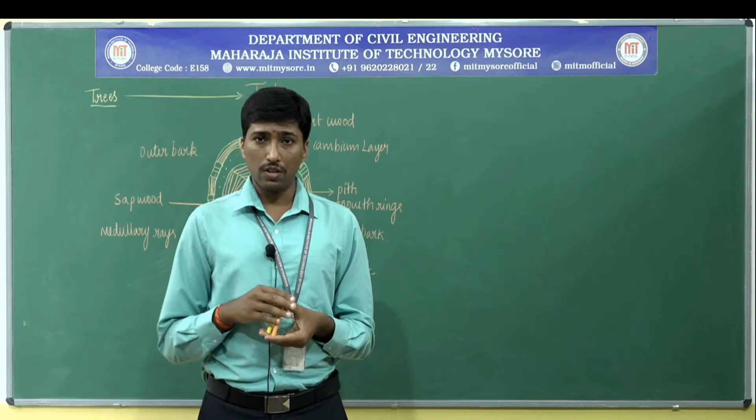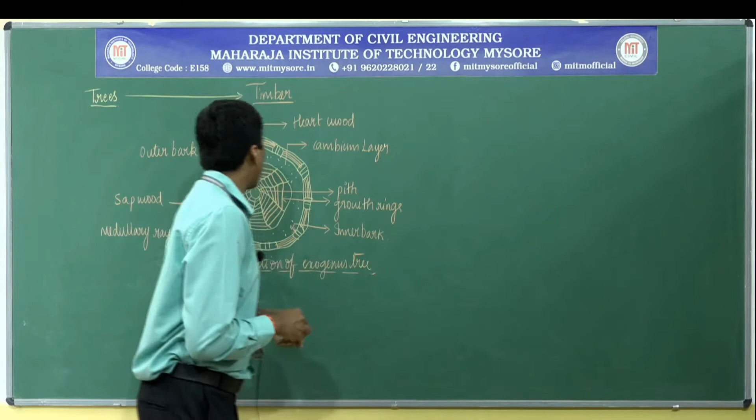Whether on the basis of growth of the wood on the outer surface or inner surface - that is a major classification. Hence we go for naming the classification as endogenous as well as exogenous type of trees. What are exogenous or endogenous? Let us get to know.

Endogenous and exogenous. Endo, the term here, represents the inner. Genus means it is the type of species or plant, the kingdom classification done in the taxonomical part of classification, where the generation of trees is taken into the picture. Whereas if you take exo, it means the outer.

These exogenous trees are mainly utilized. They have been broadly classified again into two types: one we call coniferous and the other deciduous type of trees. Let me take the classification to the next part here.

The exogenous type is classified into conifers and deciduous trees - coniferous or conifers, and deciduous type of trees.

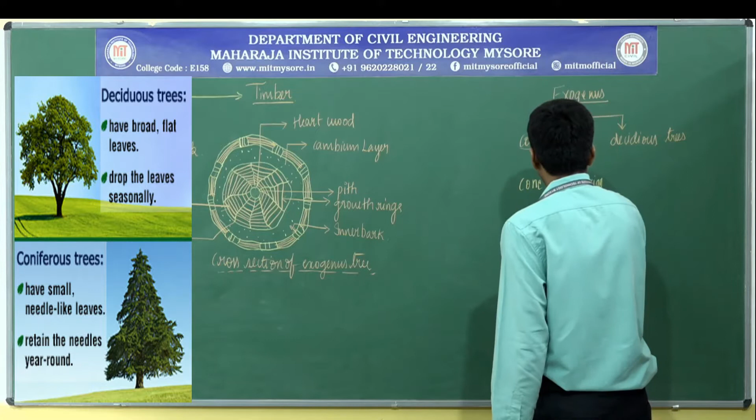The conifer type of trees means the leaves are flattened and scaly in appearance, having a needle-shaped type of edges. They have tapered edges. That kind of tree is what we call coniferous type of trees. They are cone-shaped bearing type of fruits, which is how we physically classify them - cone shaped bearing fruits.

These are called coniferous, and this cone-shaped type of fruit is where the trees are built, grown across, or subjected to plantation and set for attaining maturity. In this part, it is going to yield the type of wood we call sapwood. What is meant by sapwood? Whenever a tree has to grow, starting from the seed, then the plant arises - whatever vascular bundles are present, they tend to decay in the earlier stages, or what we come across is they tend to die. What happens is the death portion or the fibrous membranes are compactly arranged without any intercellular spaces, leading to the formation of a region we call the pith.

A pith is a region - here you can see in the case of an exogenous type of tree. I'll explain this in the later part. Now deciduous trees, obviously, are broad leaf type of trees. Examples here are teak and oak.

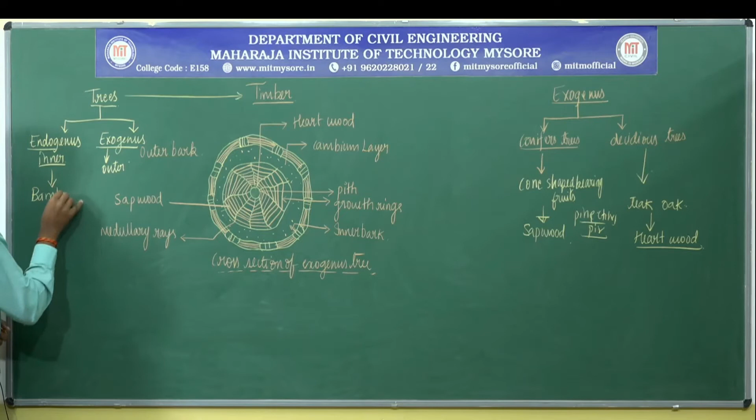Now moving on to the next part, endogenous, as I have told, means inner medium. Example: the bamboo tree. Bamboo is a fine example, or classic example, which I am going to suggest. Why? Because if you take the Malnad regions or any region all over Karnataka, this bamboo tree is growing to a greater extent.

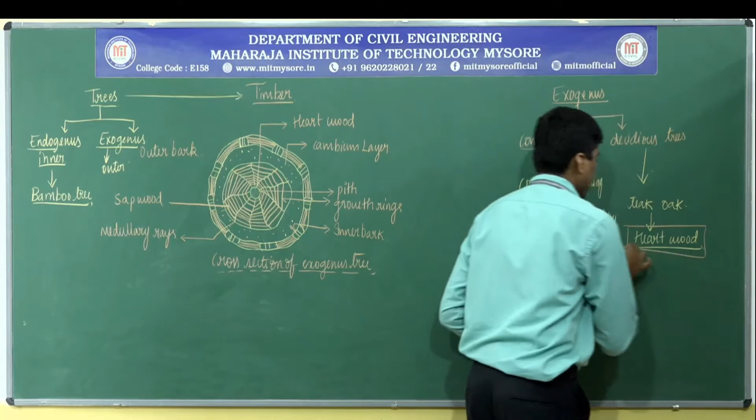They are being carved out easily. They are hollow in nature. Therefore this wood is utilized for various different purposes and is cheaply available. Most of the wood available in a cheap manner is sapwood, which is lighter in nature. Heartwood means slightly heavier in nature, and this proves to be slightly costlier compared to sapwood.

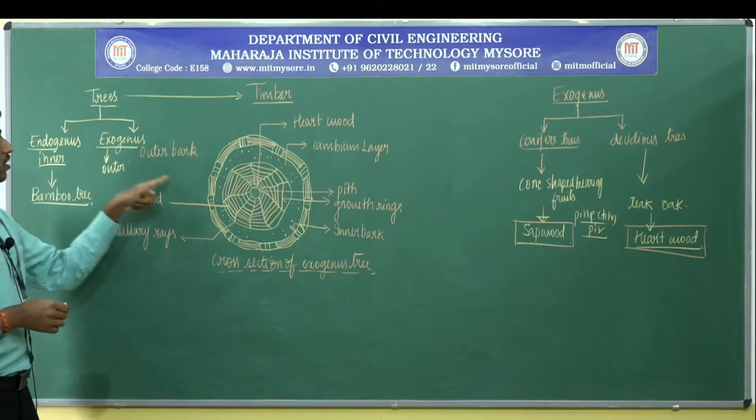Now let us take up the classification part which we have completed, but the pending part is how to know whether a tree is endogenous or exogenous in nature. If you take this example, the cross section of an exogenous tree...

Starting from the inner region, the vascular bundles are completely arranged, compactly arranged without any intercellular spaces. Upon their death, they become a dry mass completely over a period of time. The central region, we call it the pith.

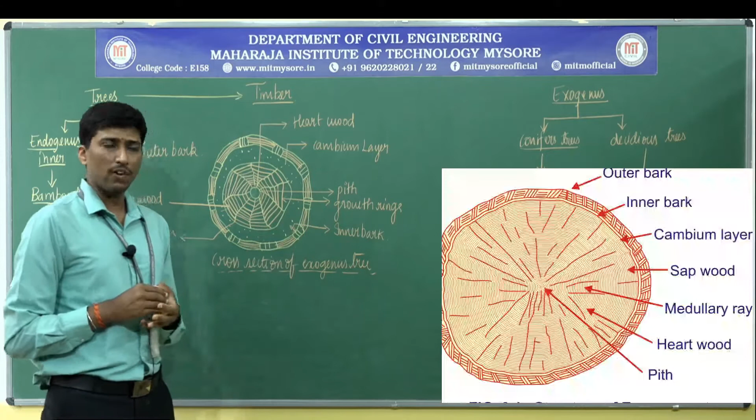After this, there are ring formations of structures drawn here. The occurrence of these rings, we call annual rings, or growth rings. Each ring gets added up year by year. So how many rings are there? They have been counted, and on that basis, the age of the tree is determined. This is the basis for the formation of the growth ring, especially what we also call annual rings.

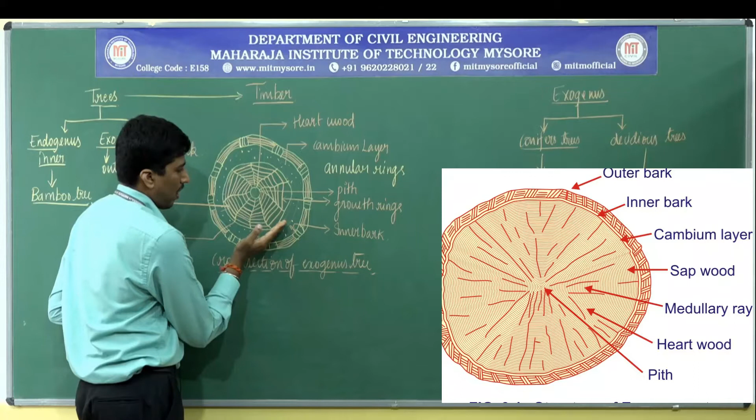Next, the region completely surrounded here, where the rays are visible, we call the medullary rays, which originate from the inner portion - this portion we call the cambium layer. That means the region between the pith and the sapwood, consisting of the medullary rays which have originated, and the inner bark - that particular region or layer is what we call the cambium layer.

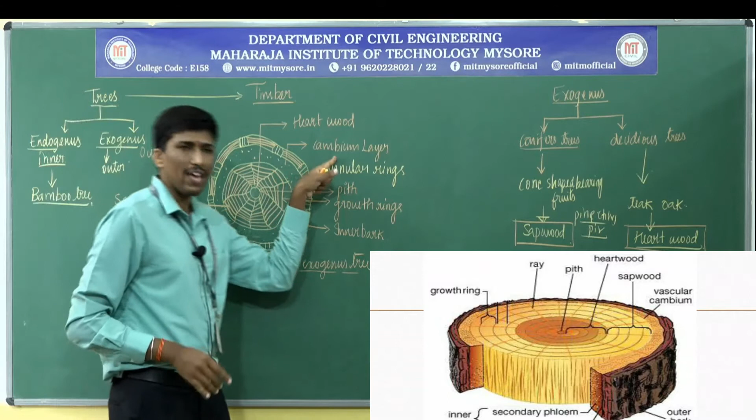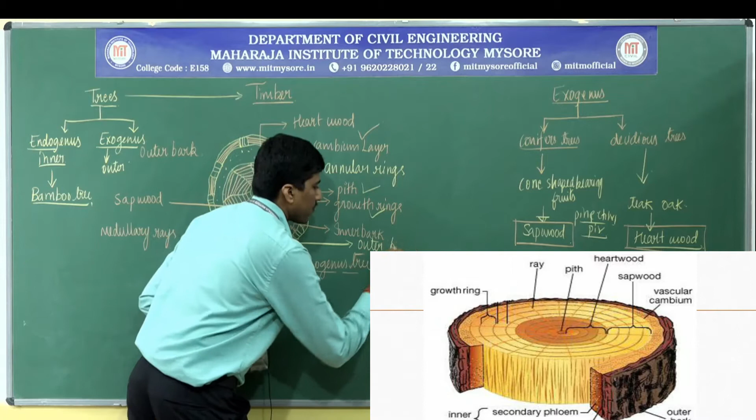Pith we have completed, cambium layer we have completed, growth rings we have completed, and the inner bark. The inner bark, as it develops gradually, numerous parts of growth take place, and that we call the outer bark. This is one of the key characteristics of exogenous trees, where bark growth takes place.

Now, the wood which originates apart from the center region, we call sapwood. They are lighter in nature due to the ascent of the sap. They still have the activity we call the ascent of sap, where water is transported through the vascular tissues over a much greater height. Due to osmotic pressure, it travels up - that's why this part of the wood is slightly wet in nature, which we call sapwood.

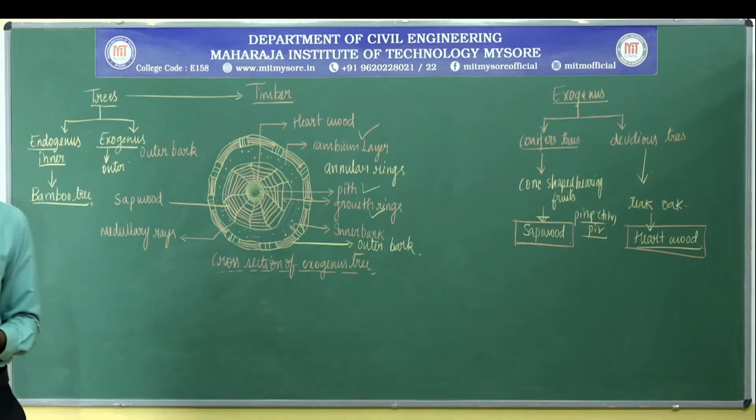The part which is completely heavier in nature, compactly arranged, we call heartwood - the central region portion we come across for this covering. The remaining portion beyond the heartwood, we call sapwood. This is the classification especially regarding the exogenous type of trees.

If you take any of the trees, whether mangrove, mahogany, or even teak or oak, whatever you take, the classification or the layer which has been formed, or the rings, remains the same. Only thing is each of them has a different genus, and the rate of growth also tends to differ.

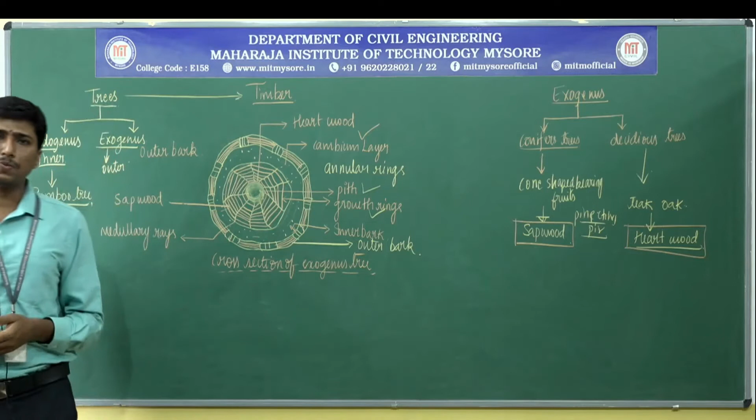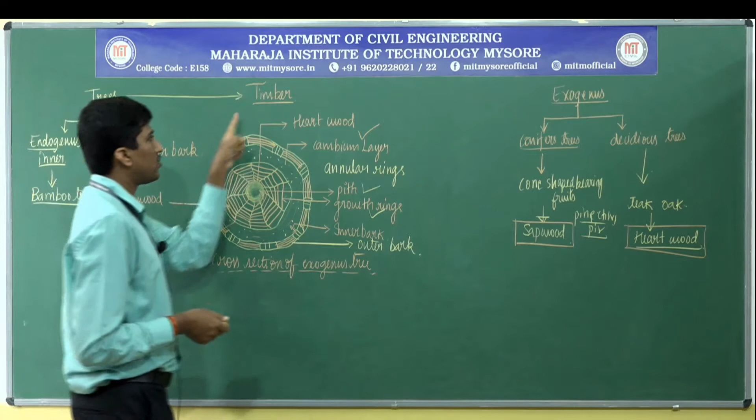Now, in the next part of timber, we need to see how timber has been utilized in society. Do they directly cut the wood and utilize it for construction purpose? If yes, in what manner? If no, what are the steps or procedures to be followed so that durability tends to increase, or the life cycle or lifespan of the timber tends to be much more feasible in nature. As I have stated, timber is the structural unit of wood, or structural part of wood.

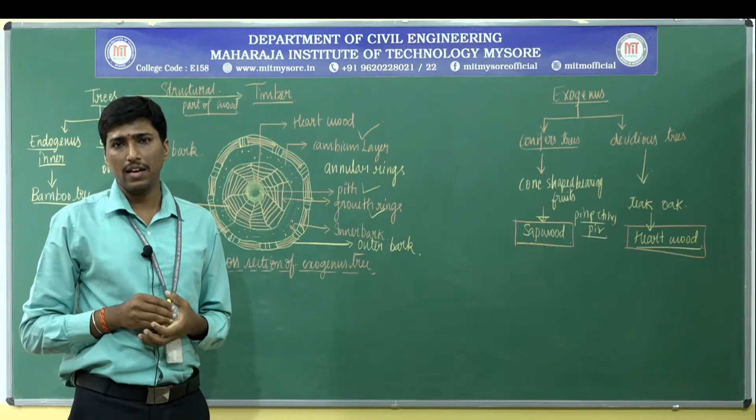All timber can be regarded as wood, but all wood cannot be mentioned or stated as timber. This is one of the important notes that you need to keep in mind.

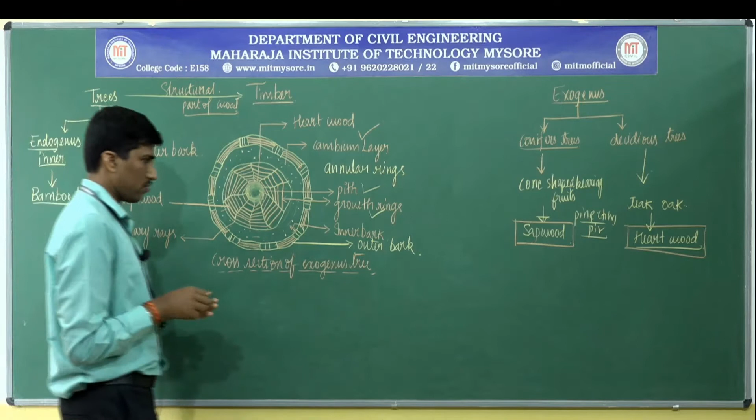Now moving on to the next part, it is how timber is manufactured. In the process of manufacturing timber, there are different things to be allocated. What are those? Let us get to know one by one. We have the process of manufacturing of timber.

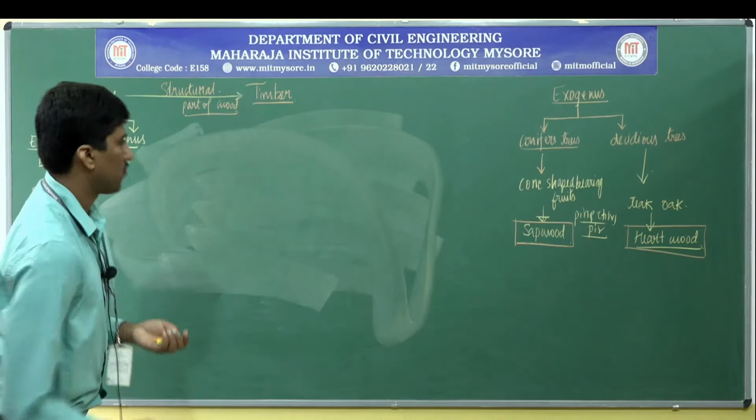First one is related to felling of trees. After the felling, it has to be properly seasoned. That we call as seasoning of trees.

Meanwhile, there is also another sort of classification in the seasoning. What are the different types, how it is being done, how it has to be cut, and how it has to be converted, and how it should be marketed. Before marketing, you need to have the preservation. Therefore, you have the conversion process, conversion, and third one is conversion of trees into the formation of timber. Finally, you need to have the preservation methods. Then you can go for the marketing of the timber.

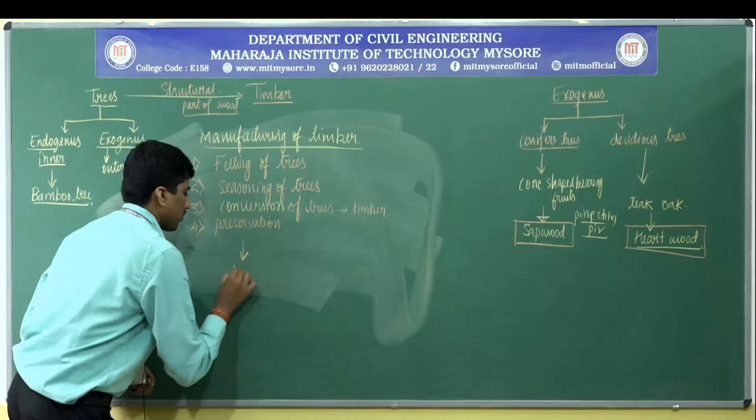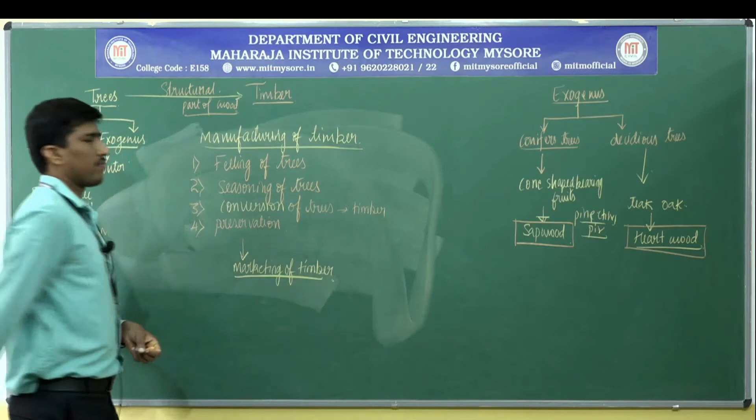So therefore, in those particular cases, water has to be driven away due to osmosis, and the felling of trees should also be taken care of at the right time. If it has been completely or over matured, then another problem takes place—either the heartwood or the sapwood, both of them have some problems. What are those problems?

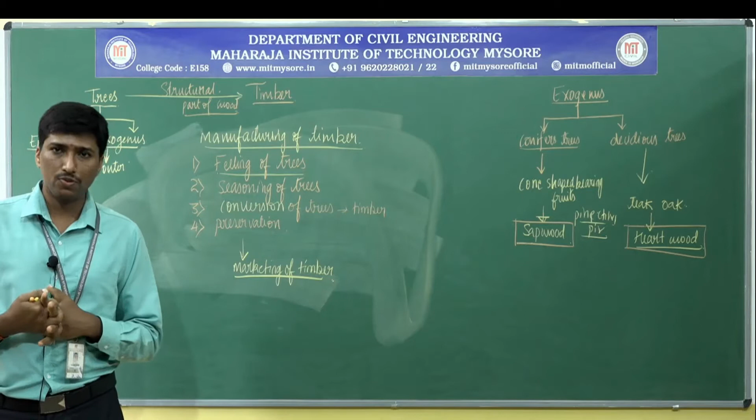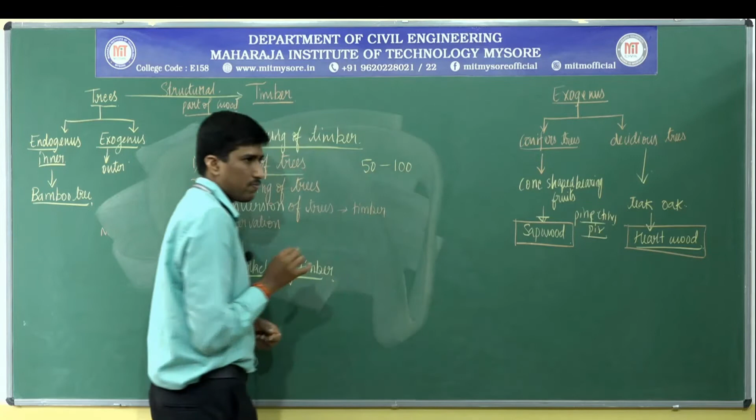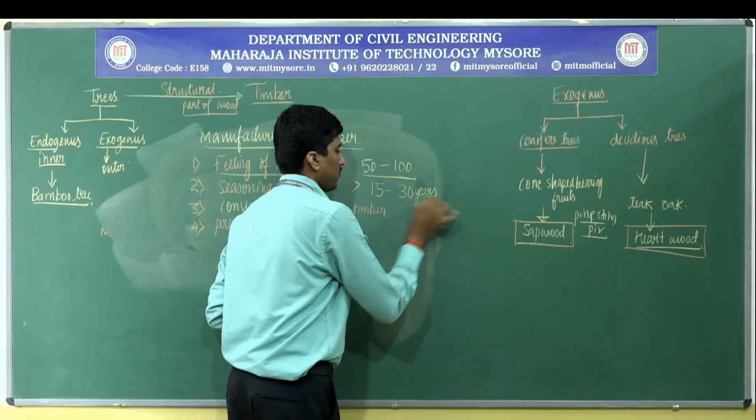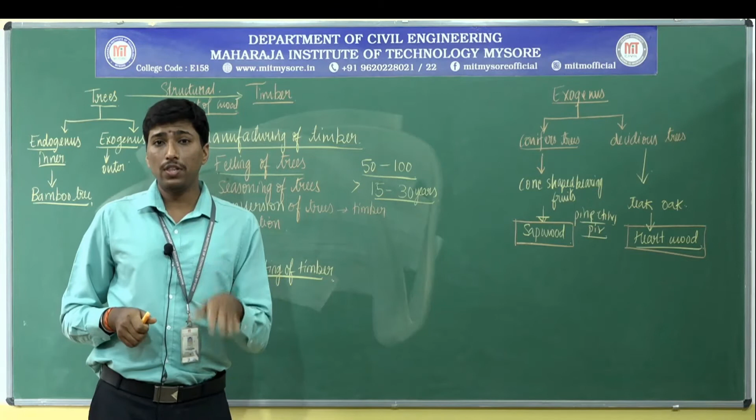Mainly, if you see in the case of age 50 to 100 years, some trees possess 50 to 100 years as the age of maturity. Sometimes for some trees it is greater than 12, or what we call 15 to 30 years. There are different sorts of classification because felling of trees is not common, and it depends upon the type of trees which are being grown in the plantation.

Next thing is seasoning of the trees. Here, one point I forgot to tell you: if the felling of the trees is attained after maturity, then the heartwood begins to decay. Therefore, care has to be taken that the cutting or felling of trees should take place at the right time, or the age of maturity.

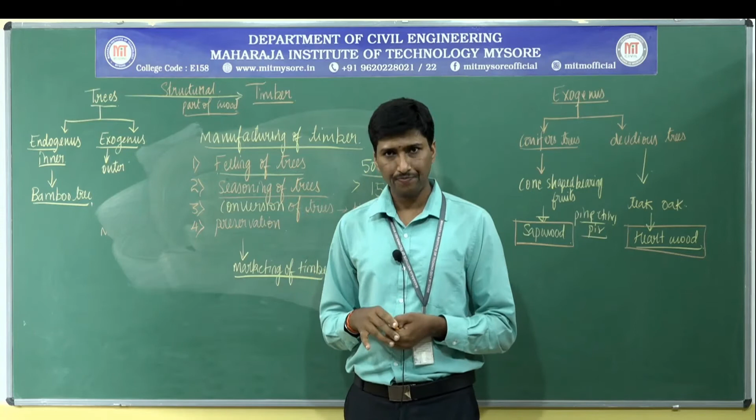That means the process of subjecting the trees either for circulation, or for thermal air circulation, or in the case of water, or in the case of boiling—that kind of phenomena to reduce the weight of the trees, we call seasoning. Seasoning involves two types: one we call natural seasoning, and then artificial.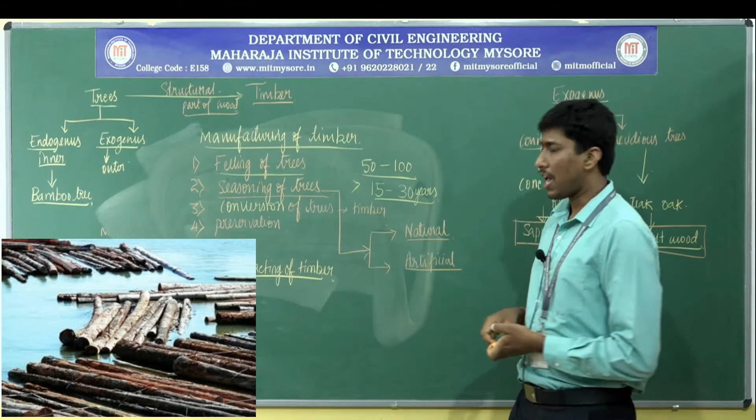What is meant by natural part of the seasoning of the trees? When trees are cut, as told earlier, 50% of the weight contains water, and therefore it has to be removed. Otherwise, the wood is of no use if taken for any construction purpose, especially for any load-bearing part, or maybe battens or a wooden beam. So it has to be seasoned, either through air or by passing through water.

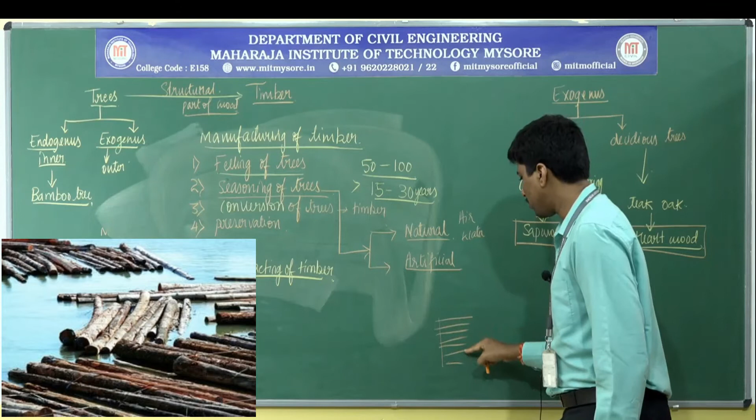These are the two types: air or water. These are the two mediums for circulation, where the wood has been stacked. Either it is in the case of 1-9 like this, 1, 2, 3, 4, 5, 6, 7, 8, 9, stacked this way, or maybe in a crisscross manner.

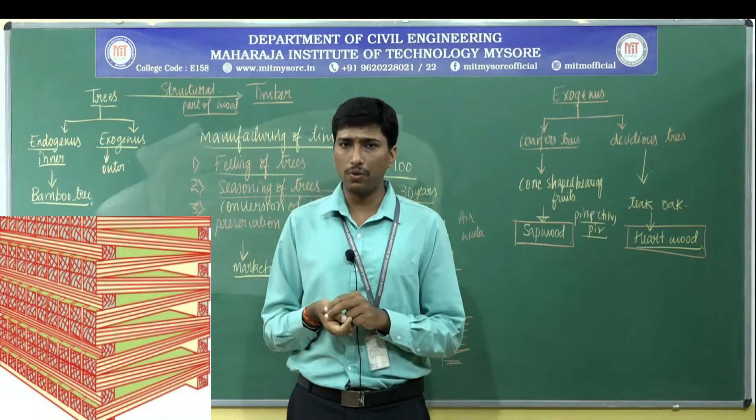In the crisscross manner, the stack of wood is arranged. Normally they have to be kept in a horizontal manner, not vertical. The log of wood which has been taken up has to be kept horizontal, especially to provide free circulation of air.

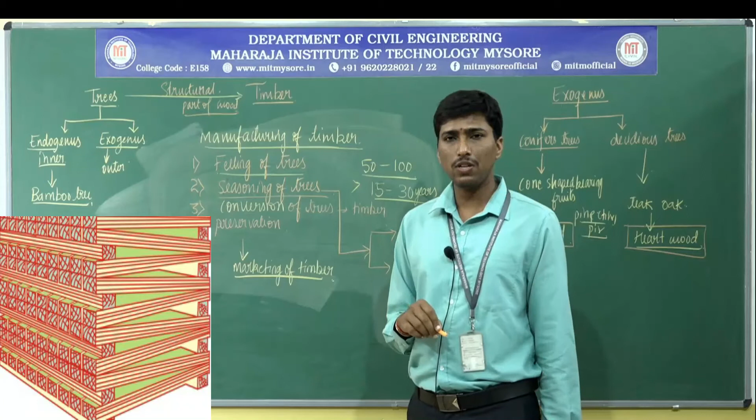Now, in the case of artificial seasoning, it is done through different processes. One is through the boiling method. Second is related to oven drying, subjected to large ovens, and passing of electric current for seasoning. Even the usage of chemical salts is utilized for artificial seasoning.

Now if you take boiling, a large tank is made so that the log of wood is completely immersed into the water, and the water is made to boil. That kind of industry has been established since the past. Here, boiling takes 3 to 4 hours, but more labor is required for it.

Hence it is not an ideal method, but instead of boiling, steam curing can also be done, where only a small quantity of water is required but the temperature rises more. Therefore it almost reduces the seasoning period or span, ensuring that shrinkage is maintained in proper conditions, and that warping or decay of the wood should not take place.

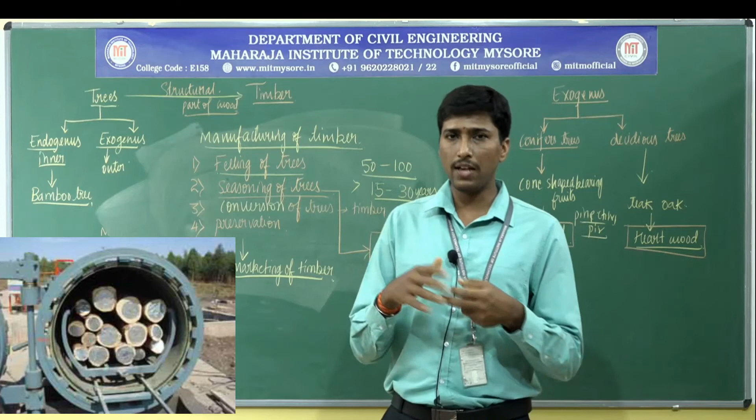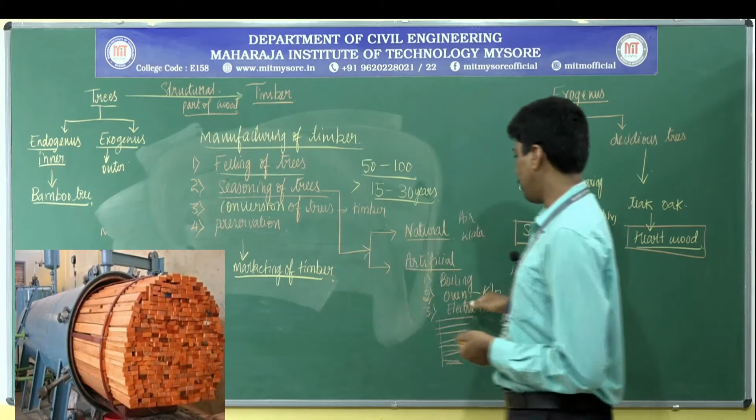That is one thing. Oven drying, where the log of wood is placed in a large scale type of oven, what we call a kiln. This is kiln seasoning, like a type of oven. The flue gases are passed over it, and the heated air is passed through it for a continuous period of time, minimum at least 6 months or so, before it can be utilized. Or in other cases, maybe in a period of 2 to 3 months also.

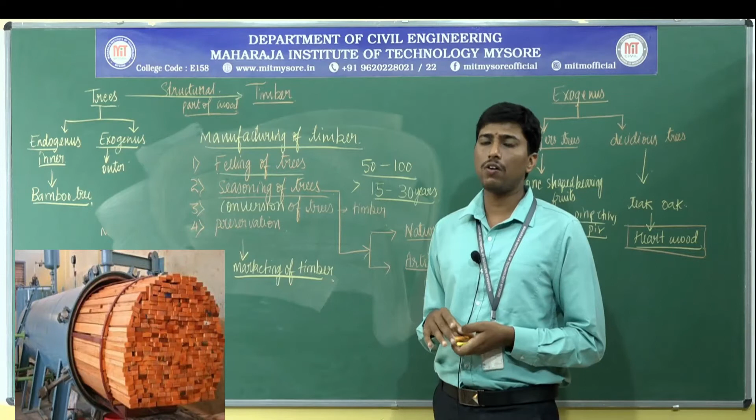Next, electric current means - obviously you know the phenomena of Ohm's law, isn't it? V is equal to IR. Same thing here: the electric current is passed through the wood, where wood acts as a conductor of electricity. Therefore, resistance will be slightly lesser in the case of wet condition.

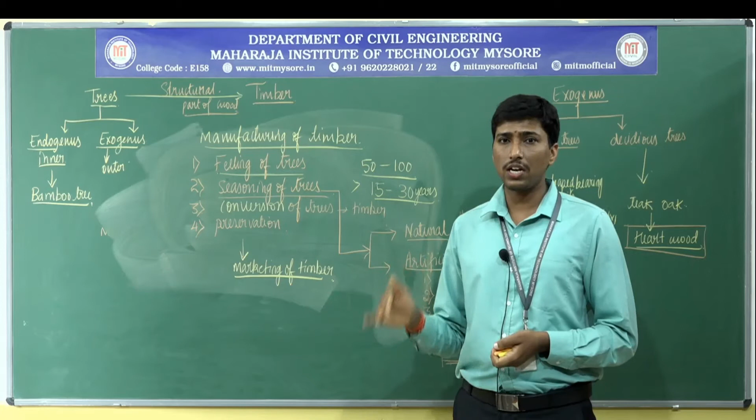In the case of dry condition, resistance will be more. So in order to increase the resistance, the electric current is passed to dry away the moisture content which is present in excess, to bring it to an optimal position. This is another part of the seasoning.

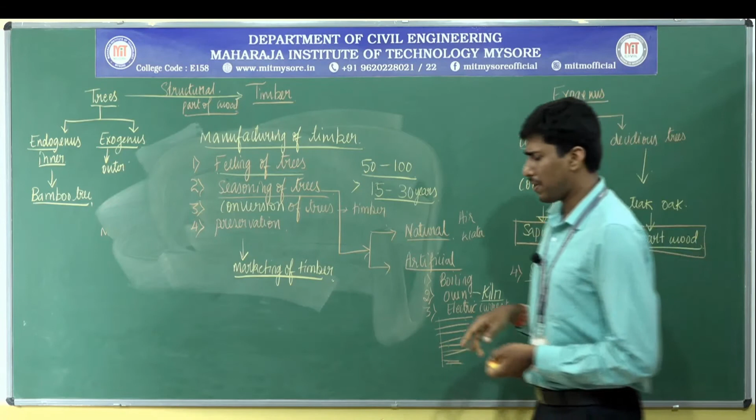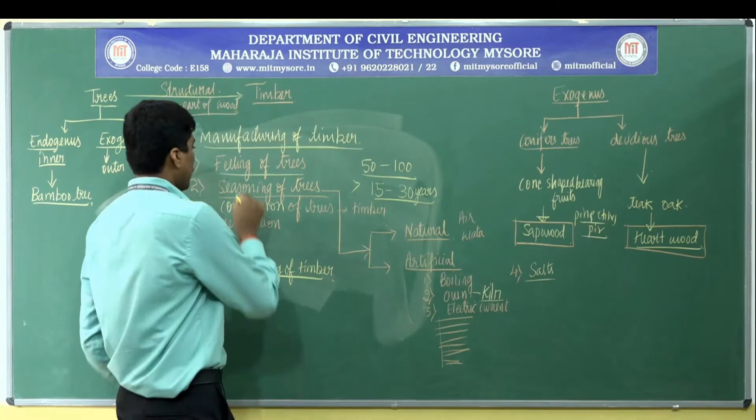Salts, potassium dichromate and hydrogen peroxide, can also be utilized. These are the salts where the salt solution is prepared and the log of wood is immersed in it. That kind of reaction takes place such that preservation of the timber also happens here itself. Therefore, in this regard of the seasoning of trees, we have learnt both natural as well as artificial methods.

Water means here, coming back to this natural part, where a fresh part of the stream has been passing on, their huge logs of wood are being placed like a barrier, so that whatever water has passed, it will get the saturation part.

When the saturation limit has been reached, the sapping phenomena tends to reduce. Thereby the seasoning can be attained because it has to be dried also.

Next step is, after proper seasoning, you need to convert the trees. How are you going to convert the trees? Do you take a complete log of wood to the whole house and build it like that? No, it has to be cut into whatever regular shape as well as sizes which are required, a proper thickness, length, width and breadth, because in engineering concerns the geometrical dimensions play a very important role.

Based upon that part, there are marketing forms which can be utilized. In conversion, meaning the process of cutting the timber, the well seasoned or dried portion of the timber is cut in different directions. That kind we call the conversion of timber. What are those? There are different sorts of conversion. Let me tell you one by one, so you also get the picture related to the conversion of timber process.

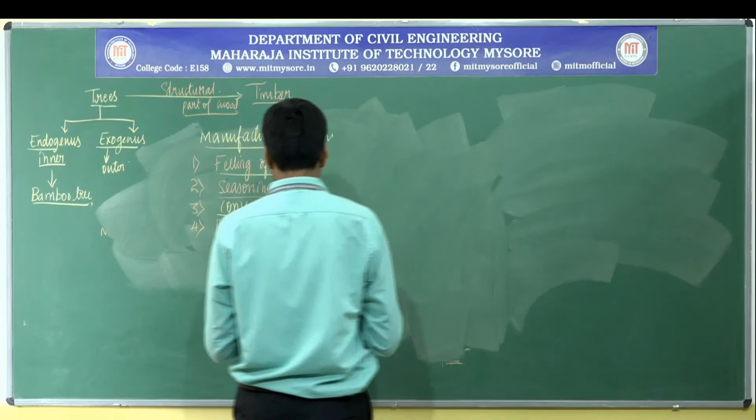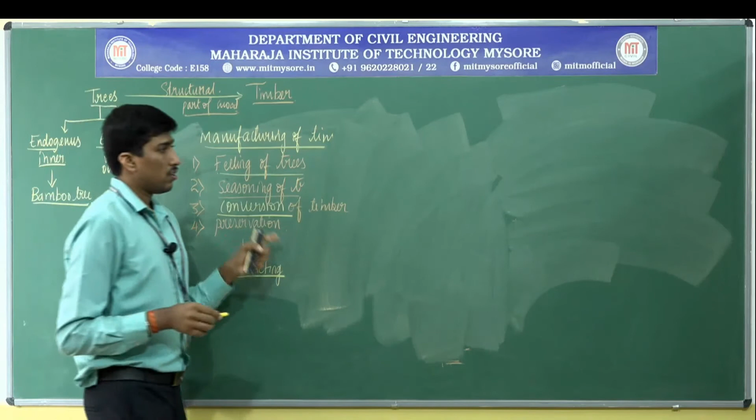Now, whatever cutting takes place, if the cutting has been taking place tangential to the annual rings, then that kind of cutting has a different name, which is like a secant in nature.

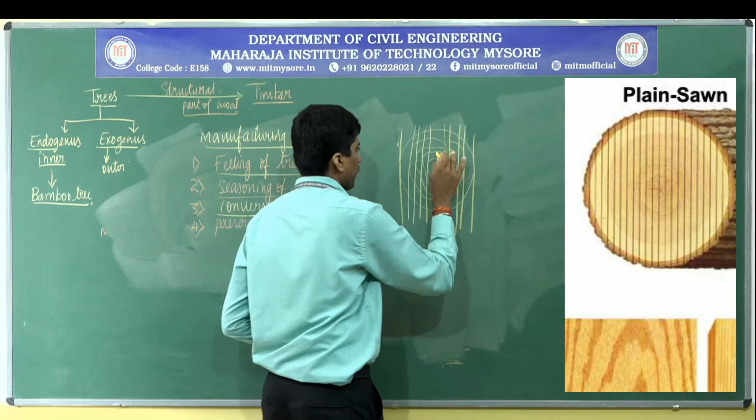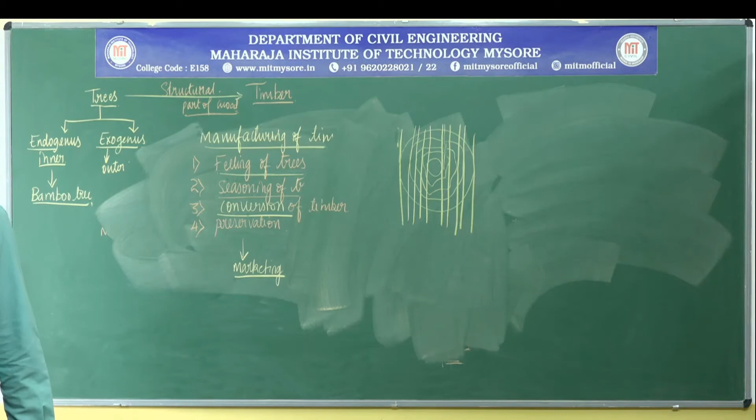This kind we call it as sawing. We call it sawing. What are the types of this sawing? Where a mill is being provided, a cutter is also ready, it is mechanically driven by the shaft. Finally, the cutting process takes place.

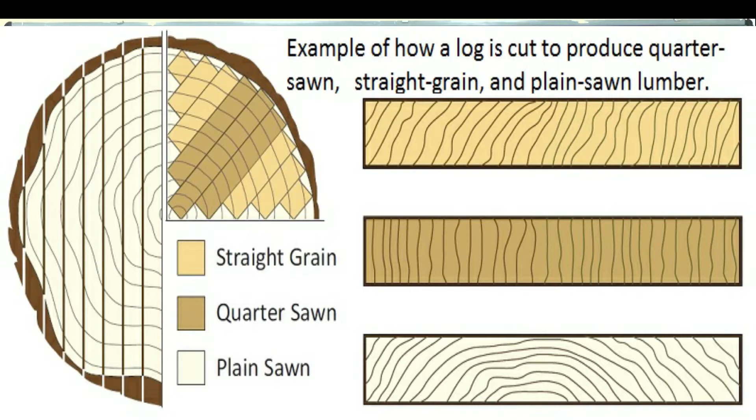Now, in this process, we call it ordinary or flat type of sawing. Ordinary or flat type of sawing, where the sawing takes place tangential to the annual rings of the wood. This part is normally adopted and is the most economical in nature.

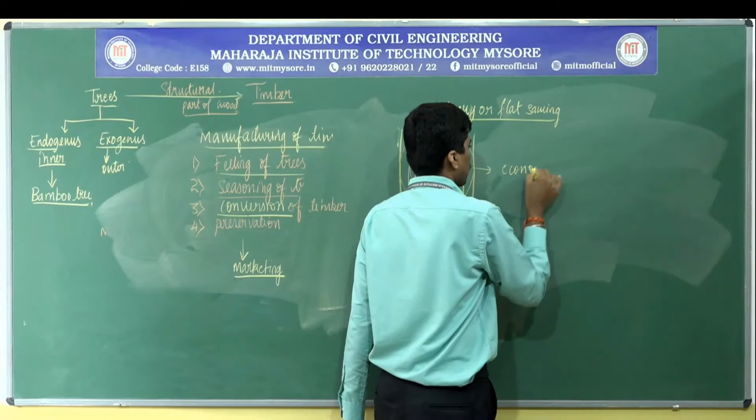Economical in nature, because sawing also has some advantages. What are those? If you have some defects in the wood like knots or irregular growth, that has to be cut and it is of no use. And if the tree is suffering from any sort of disease, though it has been felled, care has to be taken for proper seasoning in order to see that it is completely preserved in nature. So this kind of sawing renders the economical, or we call it the flat type of sawing.

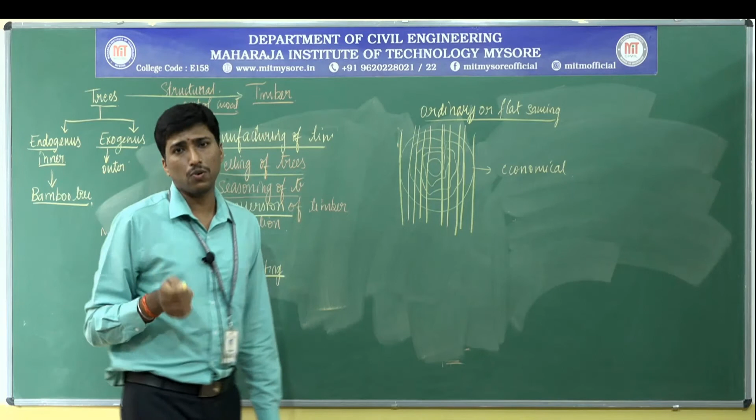Next we have the quarter type of sawing. Quarter type of sawing. How does this sawing take place is another sort of question.

The sawing takes place in a quarter manner where the medullary rays are originated and the annual ring is also present like this. Now, if I want to saw, I need to see that the sawing is done at right angles to the medullary rays like this, right angles to the medullary rays. This kind of sawing is what we call quarter sawing. Next comes another two types of sawing.

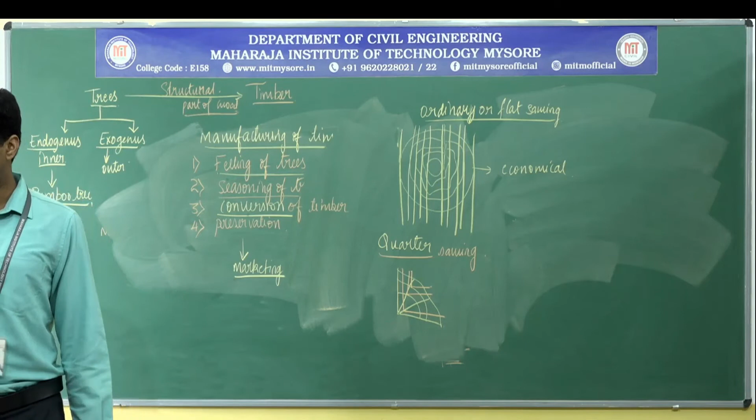One we call tangential sawing. We have a tangential sawing.

Like this, if we have it, the cutting will be done in a tangential manner, like this. The cutting process is carried out completely at right angles to each other. This kind of sawing phenomena is what we call tangential sawing. Here, in tangential sawing, it has been done only to get the pieces in a proper range as well as geometrical shape and sizes. Only thing, it is slightly costlier in nature, this kind of sawing. We call it tangential sawing.

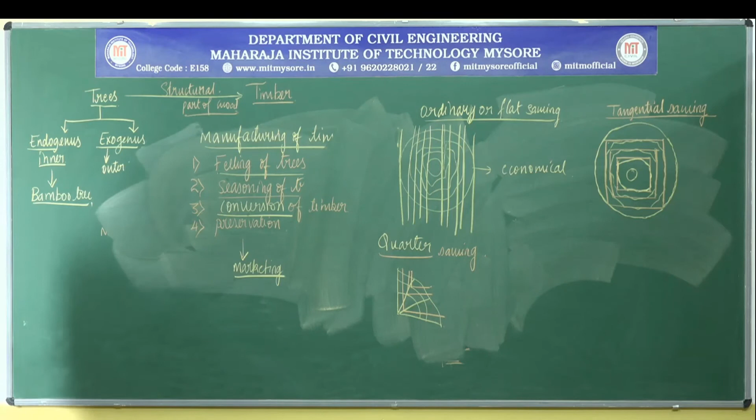If you take the case of quarter sawing itself, we have the outer bark, medullary rays which are present, and the annual rings.

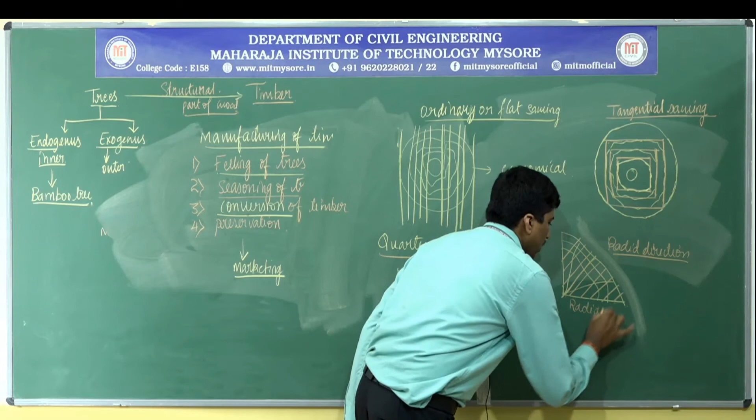Now if I go to cut it in an inclined position, this kind of sawing takes place in a radial direction, this is the extra portion. If the cutting takes place in a radial direction along the path of the medullary rays, then this kind of sawing is what we call radial sawing. It is completely inclined in nature.

So these are the different types of sawing which you can see in sawmill industries. Whatever industries are present in the timber yard or layout, especially near the satellite town in Bangalore, there we have a separate layout. We call it a timber yard layout or timber layout. There huge logs of wood are utilized and stored, and later on, once they have been properly seasoned, they are subjected to cutting into required sizes. This is what we call ordinary quarter sawing, tangential as well as radial type of sawing process.

Next, conversion is over. Now how to preserve it? Preservation becomes an important part. There are different methods. Either you can use different chemically active salts, because the rate of biological degradation, not chemical degradation—mainly the timber which has been manufactured or converted into processing forms has to be saved from termite attack, fungal attack, or any microbial attack.

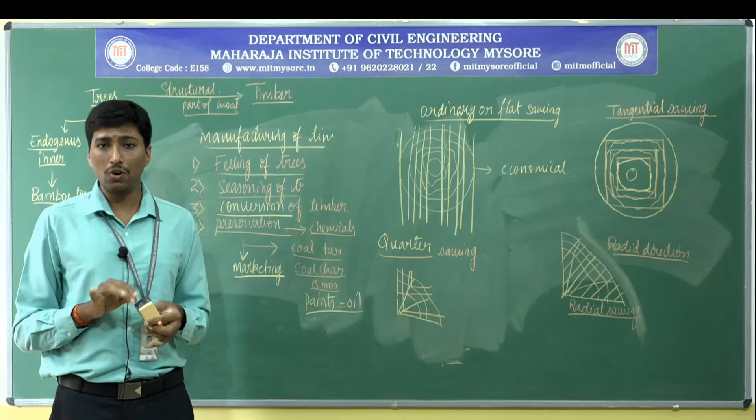Another aspect: kindly remember, in the case of stones we have the same thing, coal tar or char, and some salt solutions, and finally we also use paint. Oil paints are used especially for preservation, which also gives aesthetic appearance. You might have seen for recreational purposes, hotels, lawns, restaurants, or parks, they have painted the wood. They carve out architectural beauties in the wood—it is an artwork—and finally they give the outer touch through paints or oil paints. Hence it is utilized there.

Other than this, we also have creosote oil. Creosote oil is a byproduct of the fractional distillation process. Even that can be applied to see that termite attack or fungal growth is hampered and does not take place. This is much more important, because if termites attack, they degrade the whole quality of the wood, and cost is also a concern. However much you paid for bringing out the wood, if it is damaged by microorganisms, it means economic loss. Therefore, in all these things you need to consider preservation practices and techniques.

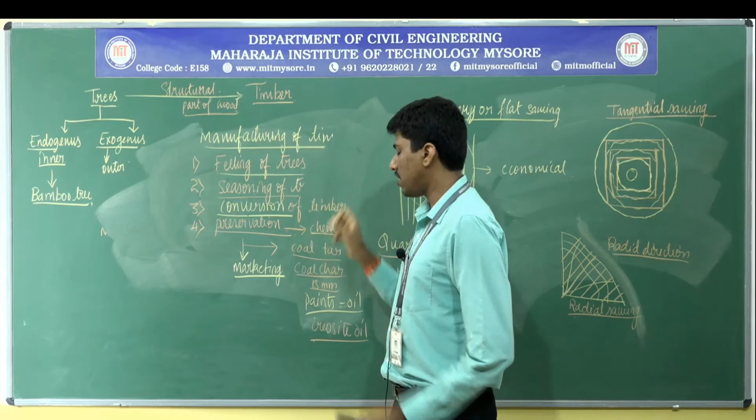Now, what are the different steps you need to understand? There is manufacturing of timber, starting from felling of trees, seasoning, then conversion into timber, preservation, and finally marketing forms. Marketing forms have different types, but before going to marketing forms, I would like to mention some of the usages of timber.

The preserved timber should be ideal in nature. It should not cause any adverse reactions in the wood, and this preserved material or wood has to be marketed. It can be utilized for furniture purposes, load bearing or non-load bearing purposes, and even in the manufacturing of musical instruments and wooden wagons.

In building railway compartments in olden days, wooden sleepers made out of teak wood were utilized to ensure more shock absorption. Even in marine applications, ships or boats were built using timber because it has corrosion-resistant properties, apart from issues like termites. Steel and other metals tend to corrode easily because of the salt content in the sea.

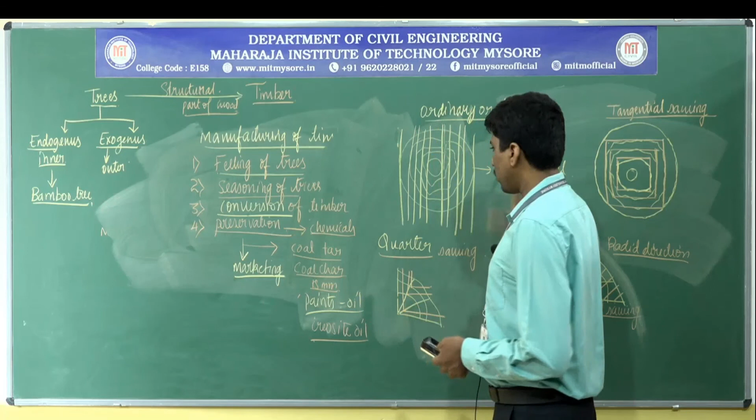Now, after going through all these things, what are the marketing forms of timber? There are different forms. We have a pole, where a log of wood having a diameter equal to 20 centimeters can be utilized. That is one form. Another form we come across is related to battens.

We also have the plank, which means having a thickness less than 50 mm where the width will be greater than 150 mm. Next is the board. A board means the thickness is less than 50 mm and the width exceeds more than 150 mm.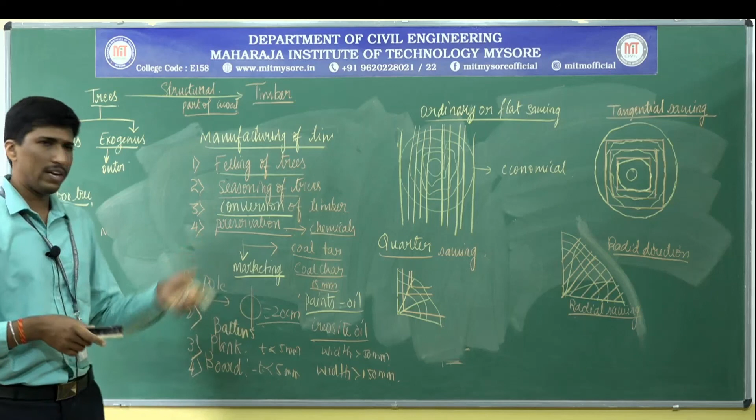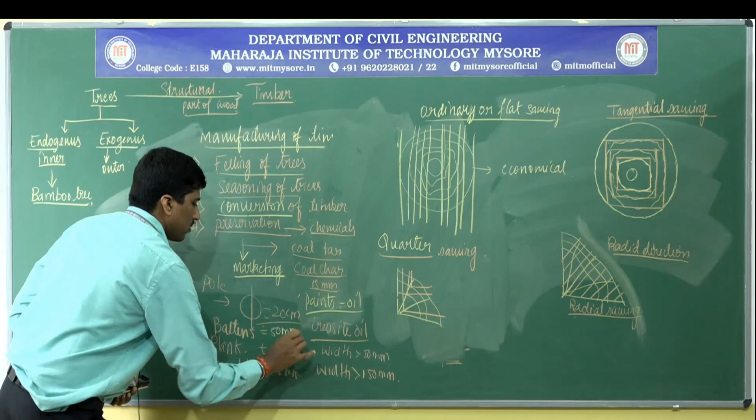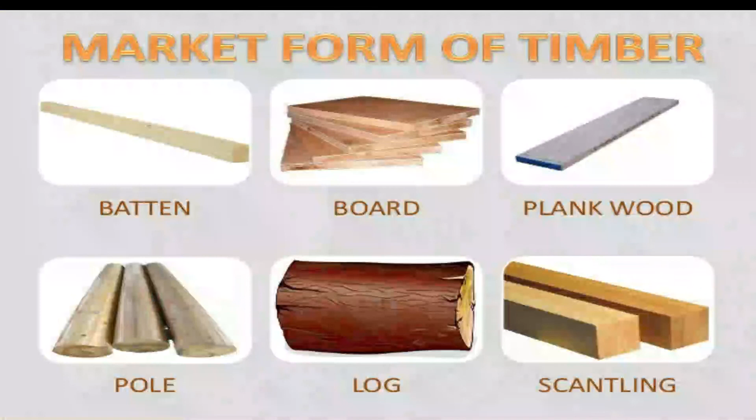That is what we call a board. There are still different sorts: 5 centimeter thickness equivalent, which we call a batten, with length and breadth of 50 mm. And scantling means breadth and thickness equal to 50 mm - we call it scantling.

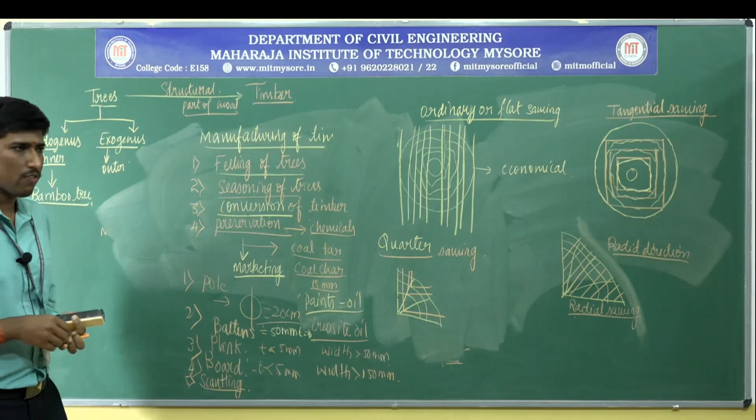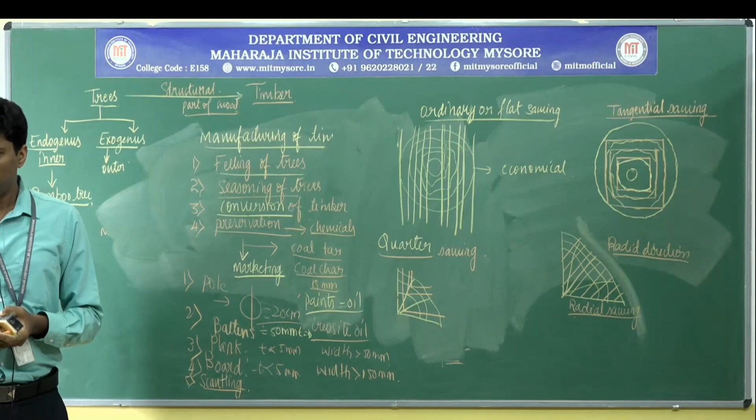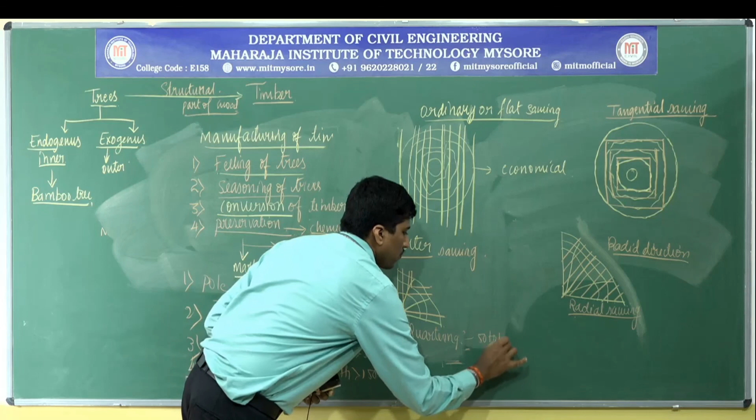Finally, quartering means the rough pieces from the quarter part of the sawing, which are also utilized, ranging from 50 to 150 mm. So, I have explained completely, starting from the manufacturing process, felling of the tree, seasoning, conversion, preservation and marketing forms of timber.